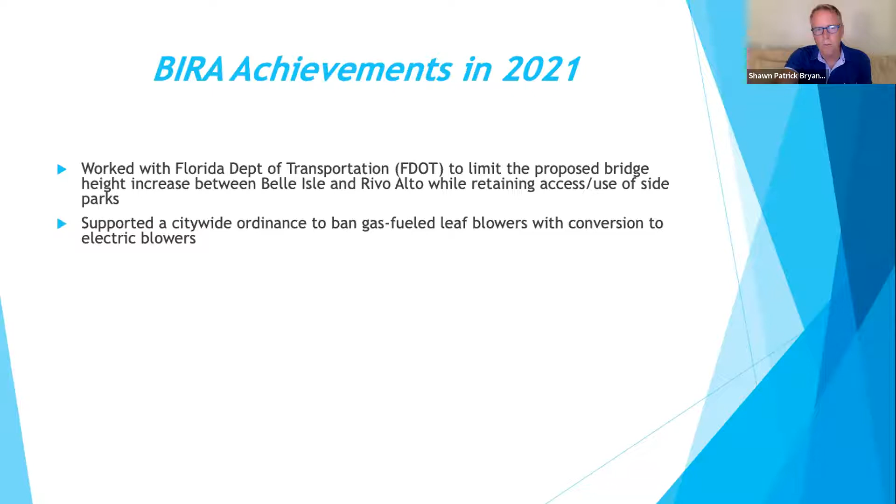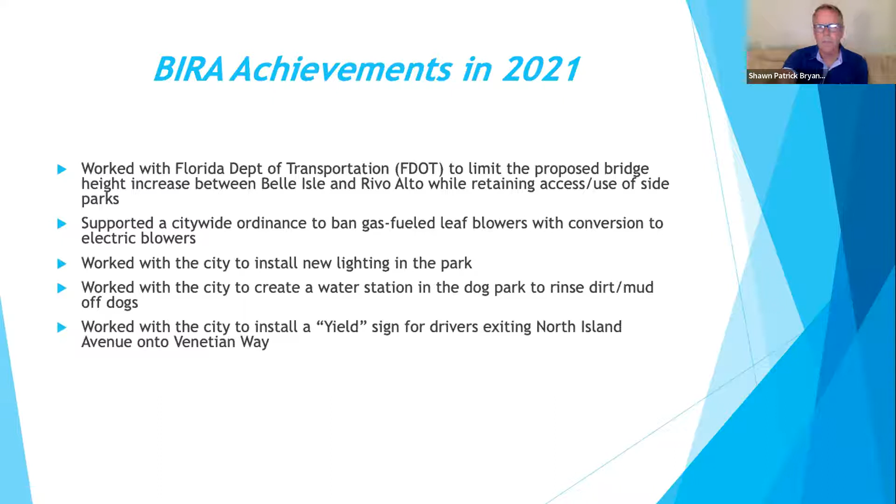Number one, worked with the Florida Department of Transportation, FDOT, to limit the proposed bridge height increase between Belle Isle and Rivo Alto while retaining the access and use of the side parks. Supported a citywide ordinance to ban gas-fueled leaf blowers with conversion over to electric blowers. Worked with the city to install new lighting in the park. Worked with the city to create a water station in the dog park to rinse the dirt and mud off the dogs. Worked with the city to install a yield sign for drivers exiting North Island Avenue onto Venetian Way.

Held a webinar with Miami-Dade Mayor Daniella Levine Cava on March 9th with 75 community registrants and 8 elected officials. And then we held our BIRA Annual Meeting on January 26th with 78 people attending.

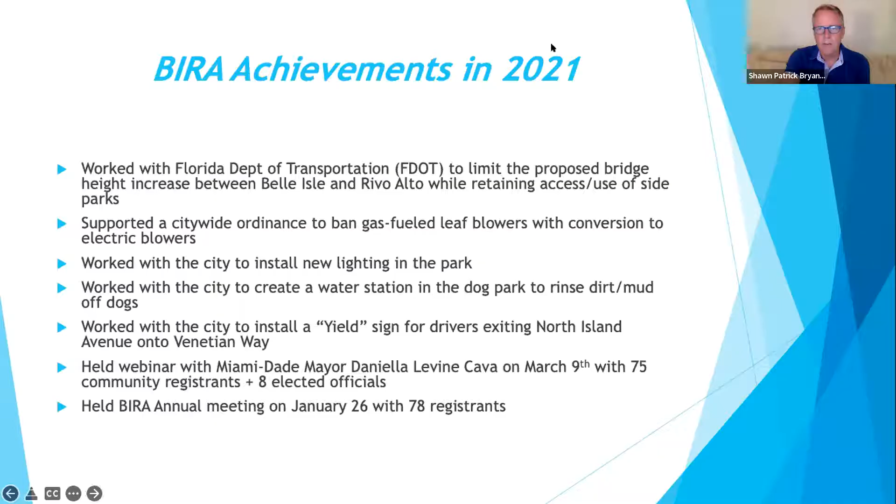Okay, and later we're going to go over some of our goals and aspirations for this year coming up. So before I go any further, I'd like to thank some guests that we have or may have soon. I'd like to thank Commissioner Mark Samuelian, who lives on Belle Isle, he has registered for this evening. State Representative Michael Grieco will be here or is here. And I know that Kevin Polito, who's our neighborhood affairs manager and always very helpful when we have an issue—thanks for showing up, Kevin.

So that being said, I'd like to introduce Joe Gomez.

Joe Gomez brings over 44 years of experience in all facets of infrastructure, including planning, design, construction, operations, and maintenance. During his career, he's worked in private land development, for the Florida Department of Transportation as a consultant, and most recently for the City of Miami Beach in Public Works. Joe is a proud alumnus of Miami-Dade College and Florida International University.

He's been a registered professional engineer since 1985 and holds a lot of accreditations and has won numerous awards. He's been a member of the Florida Engineering Society since 1996 and served as chapter president, state chapter director, and currently serves as Region 7 vice president and chair of the State Scholarship Committee. On July of 2021, Joe was unanimously confirmed by the City Commission as the Director of Public Works for Miami Beach. He's responsible for the 3rd largest department in the city with over 360 employees and 4 divisions with a total capital and operating budget of approximately $600 million.

The Public Works Department, one of the things that we're really proud of, is we are an accredited Public Works Department with the American Public Works Association, and this is actually a very prestigious organization that provides accreditation services throughout the United States. We are the 159th municipal agency, public agency to be accredited out of 27,000 in North America. And we're the 23rd in the state of Florida to be accredited out of 1,900 municipalities and organizations. We were first accredited in June of 2015, re-accredited in 2019. It's every 4 years, so we will be gearing up this year because it takes a while to get everything ready to be accredited again in 2023.

This just is an overview of our organizational structure. When I came into Public Works this past August, one of the first things I did was make some organizational changes that better suited the way the department is moving forward. So we have, as Shawn mentioned, we have 4 divisions within Public Works, and I'll get to those in a minute: the Engineering Division, Infrastructure Division, Green Space Division, and Sanitation Division.

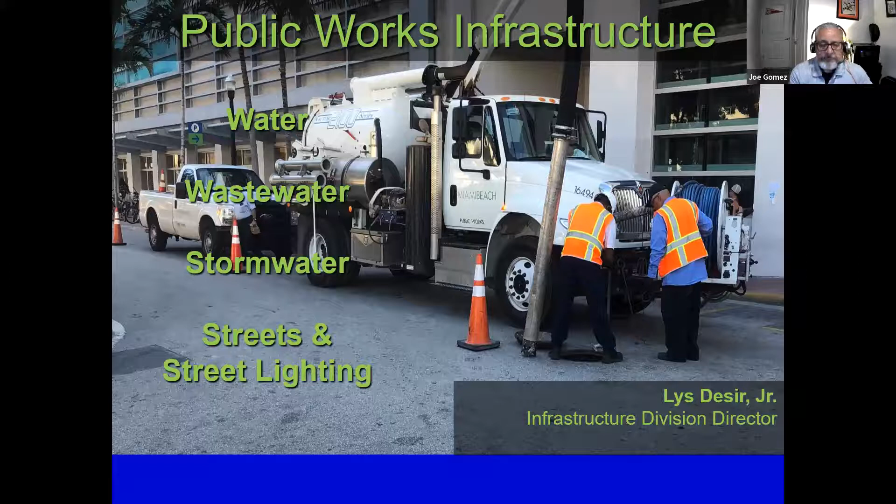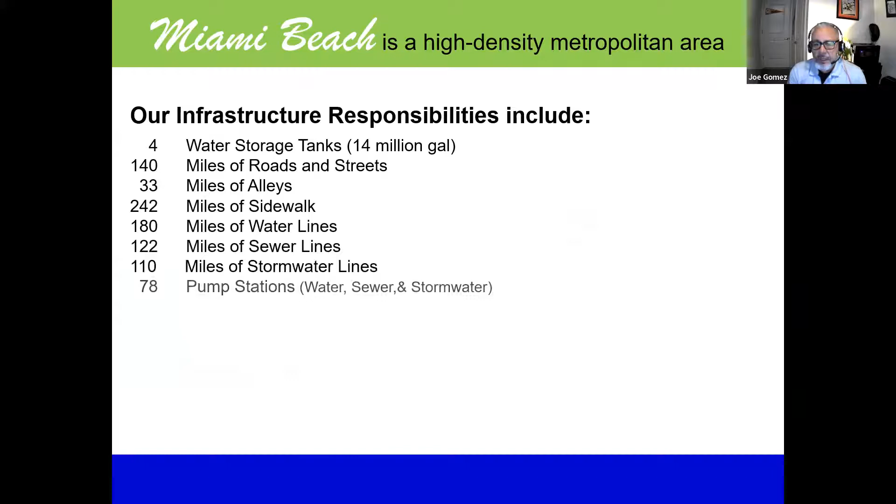Just a little bit about what our infrastructure area handles. We have 4 water storage tanks with a capacity of about 14 million gallons. 2 of them are in our Infrastructure Division yard right off of Dade Boulevard next to Miami Beach Senior High, and another 2 in the 71st Street area.

These are some of the statistics. I won't read them all, but it is a lot of infrastructure that we have. 78 pump stations in total that include water, wastewater, and stormwater. Over 7,000 street lights - some maintained by FPL, some by Miami-Dade County, some by FDOT, but the vast majority are maintained by the city of Miami Beach.

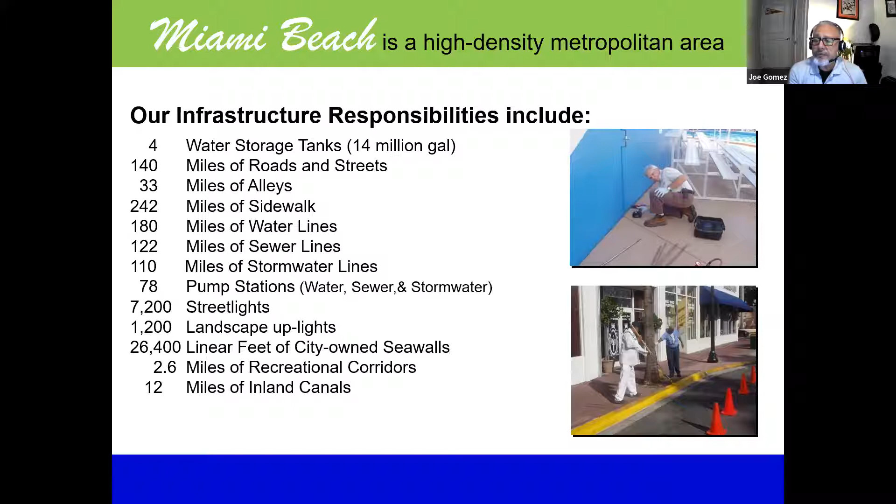And as you can see, lots of seawalls. Out of the 55 miles of seawalls that we have in the city of Miami Beach, the city only owns 5 - those are publicly owned. The rest are all privately owned. And then we have 12 miles of inland canals within the city of Miami Beach. So it is a lot of infrastructure for a city that's just slightly under 8 square miles.

In the water division, we have over 180 miles of water mains total, 86 water crossings - those are the pipes that you see crossing over bridges - over 1,000 fire hydrants, and fire valves.

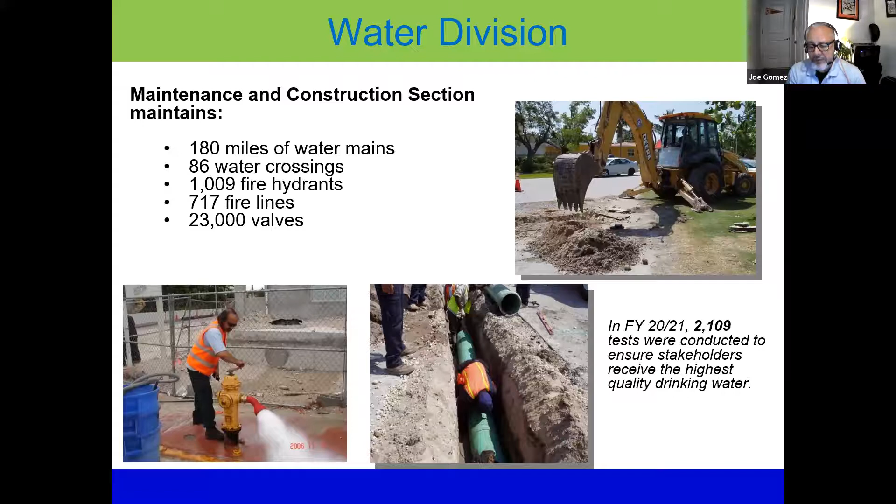One of the things that we do is we're required from the state health department, as well as local requirements, to constantly test our water to make sure it meets the highest quality standards. In 2021, we conducted over 2,100 tests to ensure that our stakeholders are receiving the highest quality water.

One of the unique features that we have in Miami Beach is we have a control room that operates 24 hours a day, 7 days a week, 365 days a year. It's always manned. At the end of the presentation, you'll have not only the phone number that you see there, but an email that you can reach out to the control room for any issues you have. This is where we track all of our pump stations, how they're responding to different pressure scenarios. If we have a water issue, we can detect all that through our system.

We're also in the process right now - we have a project in place called a SCADA project to upgrade and have more of these, including the stormwater pump stations, communicate with our control room system so that all the communications will be completely seamless throughout our city.

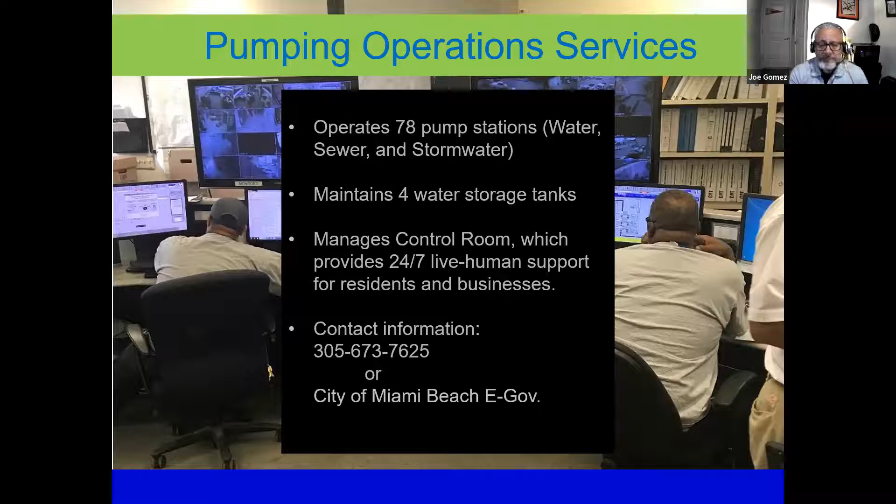The wastewater division is responsible for all the force mains, gravity sewer systems within Miami Beach. One of the unique things is we buy our water bulk from Miami-Dade Water and Sewer, and then we send our sewer effluent back to Miami-Dade County on a bulk basis, so we're billed bulk rates from Miami-Dade County.

In return, we have three satellite cities - Bal Harbor, Surfside, and Bay Harbor Islands - that we service because their systems come through the city of Miami Beach. We actually charge them a markup for the use of our facilities, and in turn that's passed on - they pass it on to their consumers, and we provide that service to them.

23 pump stations, 122 miles of sanitary gravity sewer pipes. One of the things we're pretty proud of is we were recently notified by the state of Florida through the Resilient Florida Grant Program that we received a $7.2 million grant, which has to be ratified by the legislature, but we believe it will, to continue to upgrade our gravity sewer system. We're very, very happy with that award.

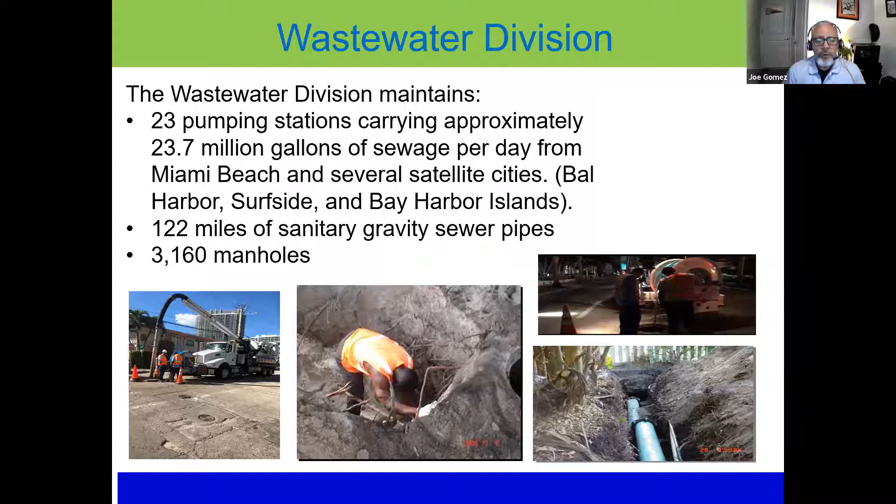The stormwater division is one of the other divisions within infrastructure, and that handles all of our stormwater pipings, our manholes, our catch basins, outfalls, and the 49 pump stations that we have online to handle the stormwater.

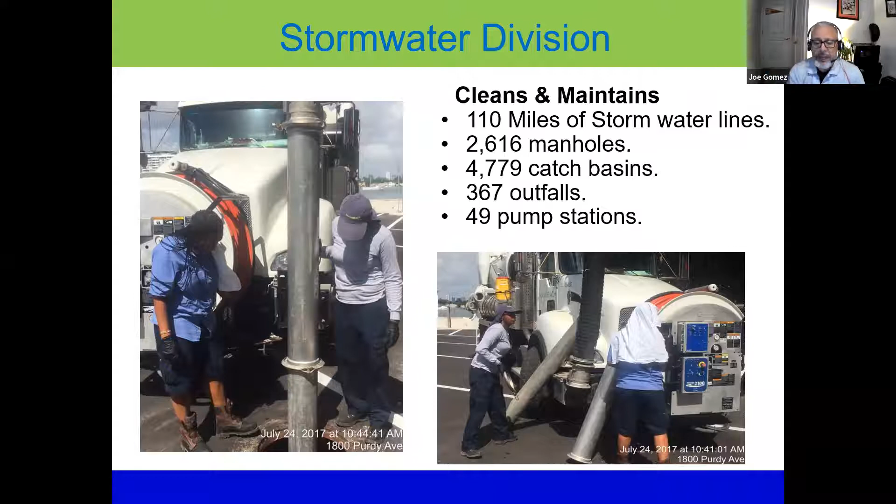And then the last division inside of infrastructure is streets and street lighting, which maintains all the roads, street pavement, street lights, bridges that are locally owned by the city of Miami Beach, the seawalls, things of that nature, landscape uplights, street lights.

We have cooperative agreements with Florida Department of Transportation where we maintain lights, for example on Collins Avenue, although it's a state road. We have a contractor that specializes in maintaining FDOT lighting systems who does maintenance on those lights, as well as in-house forces constantly doing upgrades and maintenance of our street lighting system.

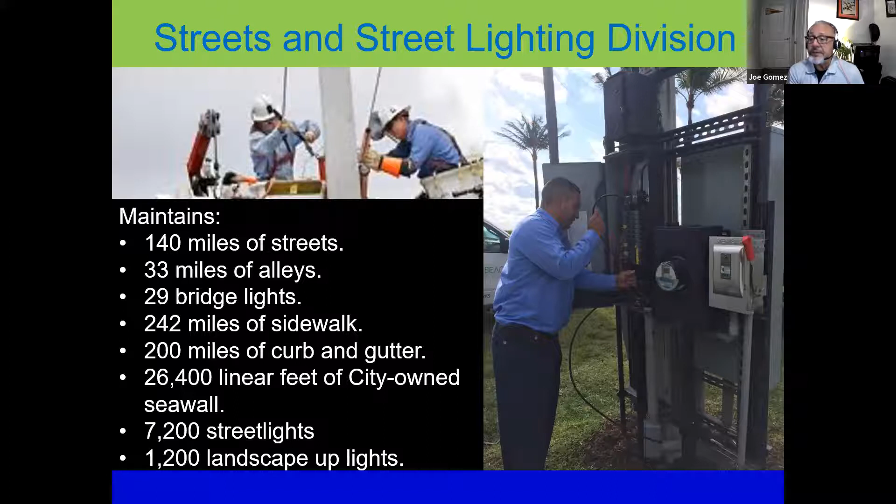Next is the sanitation division. Of the 4 divisions within Public Works, this is the largest, approximately 200 employees. Bradford Kane is our sanitation director, division director.

Brad is a highly experienced public works specialist. He has served in this capacity in other municipalities throughout South Florida in his 20-some-odd plus year career, so he has a lot of experience, particularly in the sanitation area. We're very fortunate that Brad is part of the team.

Collection and disposal of residential garbage, residential recycling program, street sweeping, public rights of way, disposal of litter from public litter bins - that's all part of our system.

The way we work in Miami Beach, our collection and disposal of all residential garbage is done through a franchise agreement with two waste haulers, Waste Management and Waste Connections, throughout the city, and then also the recycling program as well.

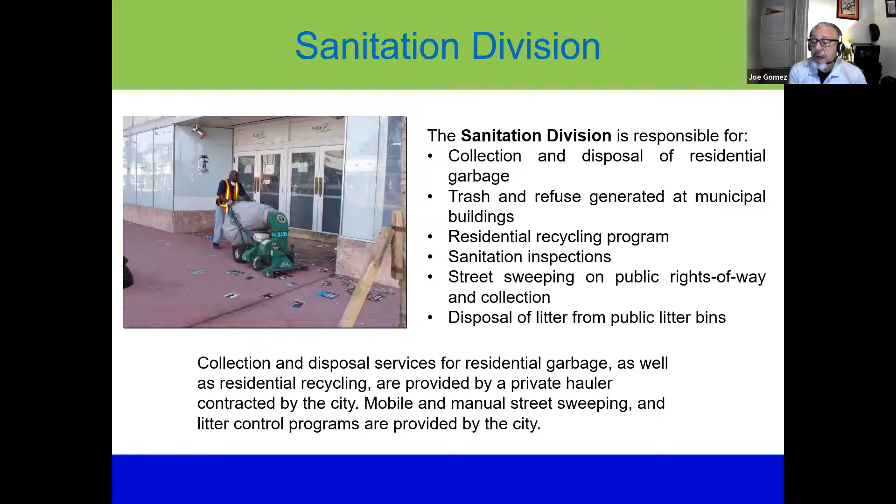In addition, we obviously collect from all the trash receptacles throughout the city, the street sweeping, and the litter control, doggy receptacles. We maintain those as well.

In street sweeping, we have 4 street sweepers that patrol the city, about 160 miles worth, not only city streets but county. We have some county roads, like Dade Boulevard, under Miami-Dade County's jurisdiction. Alton Road, for example, is a state road. So we sweep the vast majority of the roads within the city.

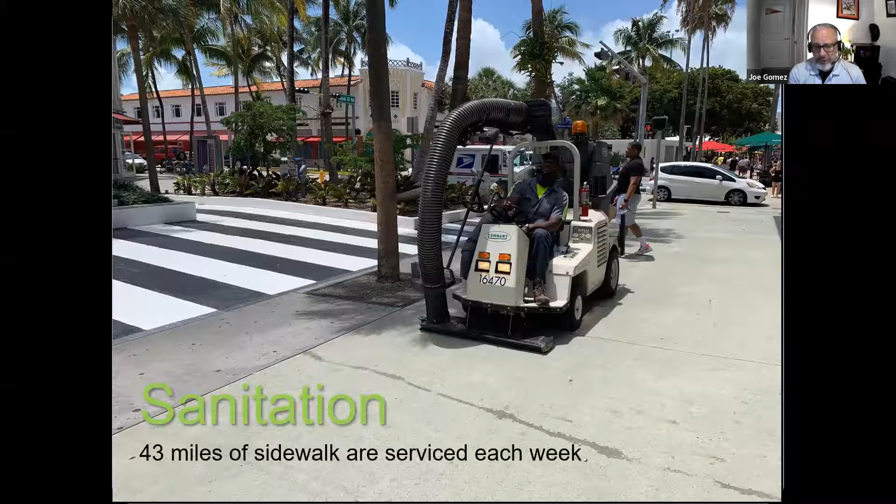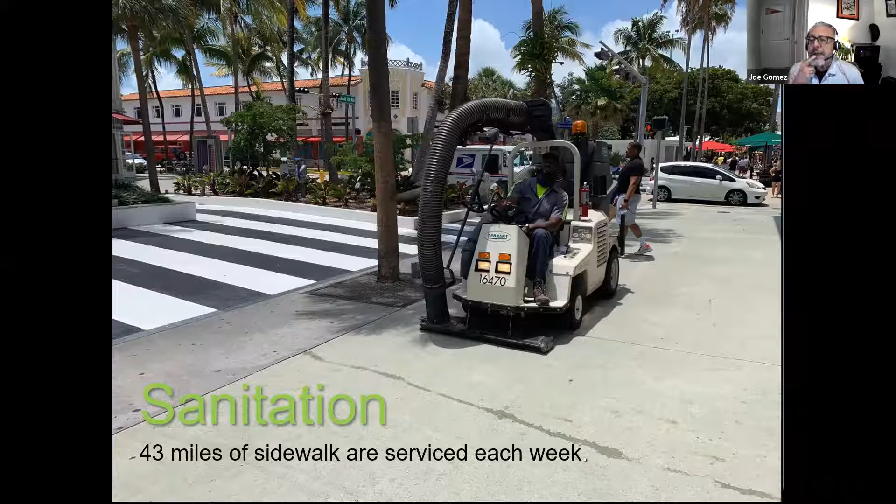And then we have the portable units we use, for example, on Lincoln Road, as you see here. We're looking at newer technologies now instead of gas powered. As we're moving away from gas powered leaf blowers, we're also looking at hybrid and electric technology for both the street sweepers, as well as the smaller sweepers and vacuums.

We do a lot of pressure cleaning throughout the city, in particular areas, removal of graffiti when we find it. We work with our facilities group doing that pressure cleaning and replacing receptacles, because of our aggressive environment in Miami Beach, they tend to start rusting out. So we have to remove and replace them, constantly making sure they're in good condition.

As was mentioned earlier in Mr. Bryant's presentation about moving from gas powered to battery powered, that is correct. We're converting green space - our green space division has already moved in and is completely battery powered. Sanitation will be totally moved over to battery powered technology by the end of the first quarter of 2022. That's a commitment we made - it was an ordinance passed in the city, so we're moving in that direction.

Our engineering division handles anything related to design projects throughout the city. We also provide ADA responsibilities throughout the city. We inspect and certify elevators, both private and public. Engineering covers everything from regulatory compliance, planning and design, to construction management, overseeing construction projects.

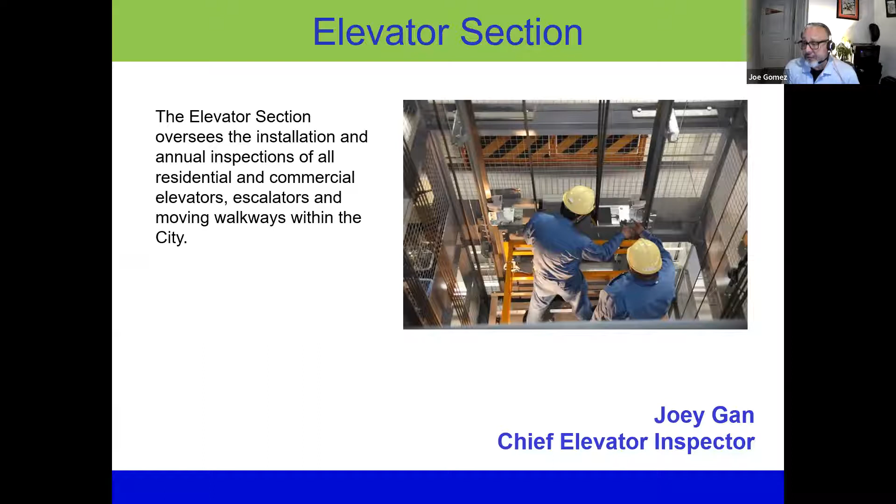Elevator section, Joey Gan, highly experienced chief elevator inspector. His team constantly works on certifying and inspecting elevators, providing plan reviews for new buildings coming online that will have elevators. Also escalators and moving walkways are covered within the purview of the elevator section.

And then engineering, obviously all kinds of different services that we provide that are critical to really getting the product out, making sure our infrastructure is designed correctly, and providing all those services.

Water quality is an incredibly important issue. We've got several different programs going on right now. The city adopted a blue-green infrastructure program, and we've got a bioswale project that's part of it that we're in the process of completing on 59th Street between North Bay Road and Alton. That project should be completed by the end of this month, and it's one we worked on very closely with Miami-Dade County as well as the Florida Department of Environmental Protection. We also finalized our integrated water management plan, which addresses both water quantity and water quality.

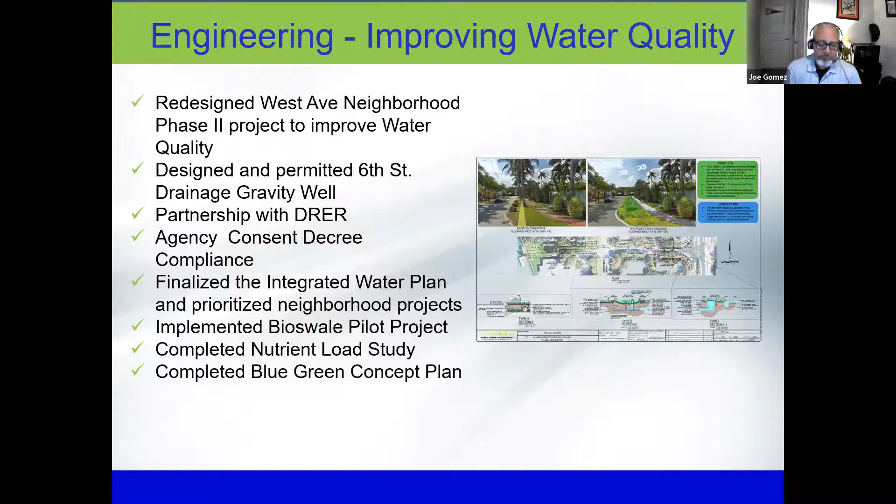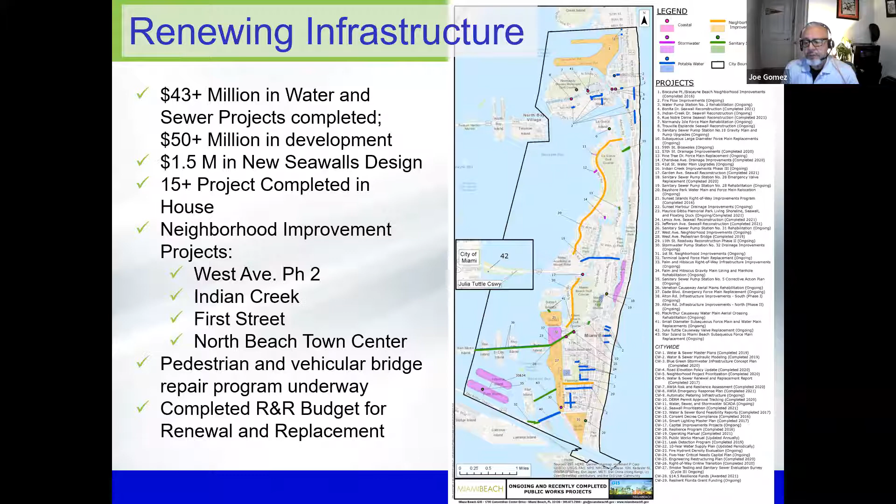The GIS is an incredibly important tool. Nestor Navarro, a GIS professional, is the manager of this group. We work with everything from making sure addressing in the city is correct for billing purposes, making sure we have the correct information for all our residents, to cartography to provide the most accurate mapping. We work with all the agencies to make sure the cartography of the city is accurate and correct.

Asset management makes sure we track all our assets, everything from lights to drainage structures to everything considered a public asset within GIS. We work a lot with our Department of Emergency Management, making sure we track, even during potential storm events, all data available, potential areas for flooding, things like that. That's all provided by the GIS database.

We also work with our police department in terms of providing them information related to crime statistics and things like that, where PD may have a particular project they request, and GIS will provide that information for them.

Our right-of-way department is responsible for anything related to work within the public right-of-way. Utility work, street closures, driveways—if you're constructing a new driveway connecting to the city street, that's got to go through a right-of-way permit. Crane setups and equipment, when cranes have to set up to install air conditioning units on buildings, they occupy the right-of-way and are required to have a permit. Sidewalk cafes, parklets, even newspaper and bicycle racks all have to go through the right-of-way department.

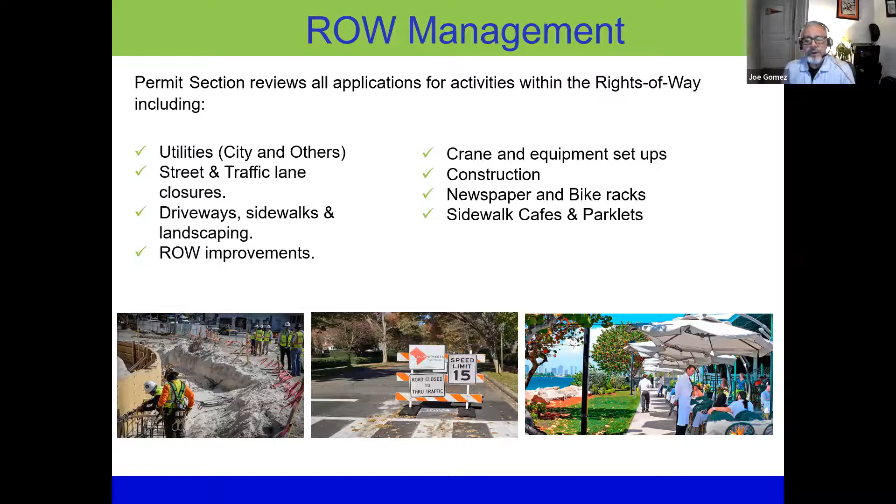O'Neill Rodriguez is our right-of-way manager, part of the engineering division. And Brian Bellino is our city surveyor—a repository of information, as most surveyors who have been on the job for a long time are. He's sort of a historian, with a tremendous amount of information on the city and all its boundaries and control points. We work closely with the city attorney's office interpreting legal descriptions and easements, which is very important in a city like Miami Beach with a lot of development. He's the repository of a lot of our documents.

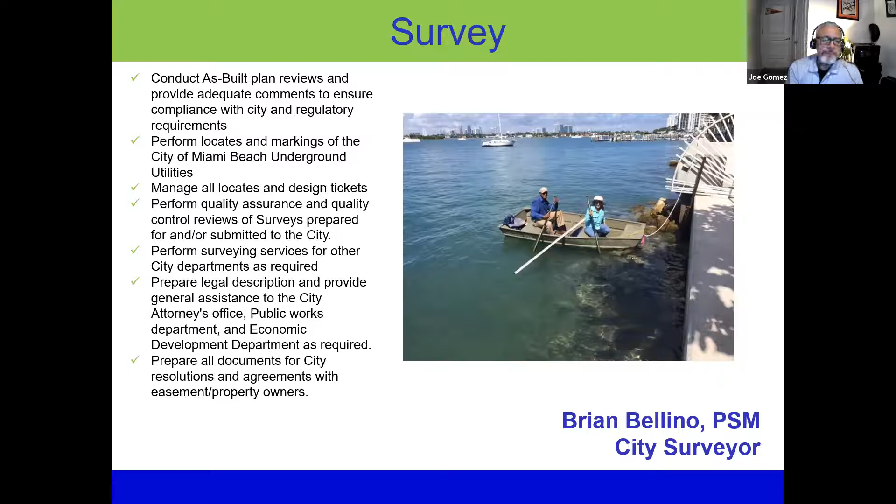Because our green space group is relatively small, about 25 professionals, a lot of our maintenance services in terms of pruning and normal routine maintenance is contracted out. We do have a team that does emergency pruning services and things of that nature, and we also do special projects and installations that we may get requests for—our team performs that internally. We also have consultants that help us out. What we don't do is trim near power lines, primarily because it's a safety issue.

Trimmers that trim around power lines have to go through special training and be approved by FPL, since FPL is our utility company that handles power. They have to be pre-approved by FPL in order to come near the power lines. So I know sometimes you get requests on trimming fronds near power lines - if it's too close, we cannot do that. We are in the process right now of bringing in an FPL-approved contractor on board to have on standby for situations like that. But in cases like that, we have to fall back on FPL's contractor to be able to trim around power lines.

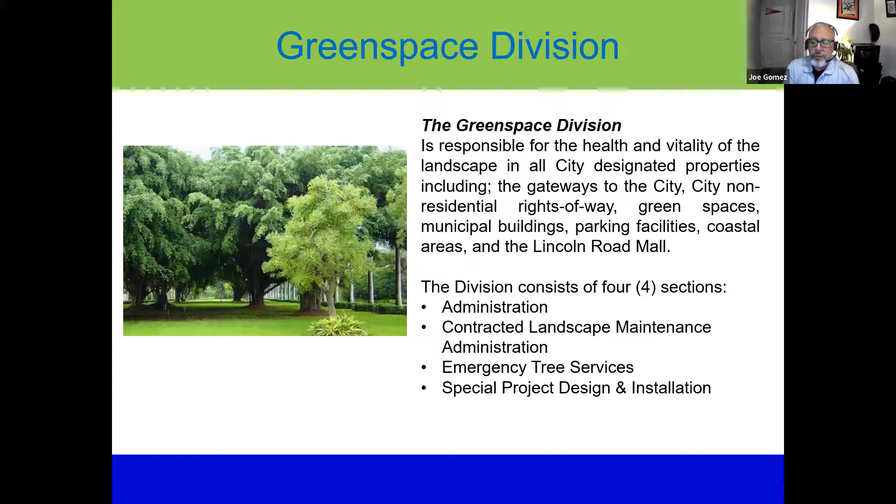And then this is just the administration services. We work also with our parks department, our facilities department, and parking department to make sure that landscaping within those areas is up to city standards. And again, special projects that we may be asked to do, as well as any emergency tree trimming service. If a tree is sick or about to fall - we've had that case where after a storm, we've had trees that are about to fall - our green space team will be dispatched to dispose of the tree.